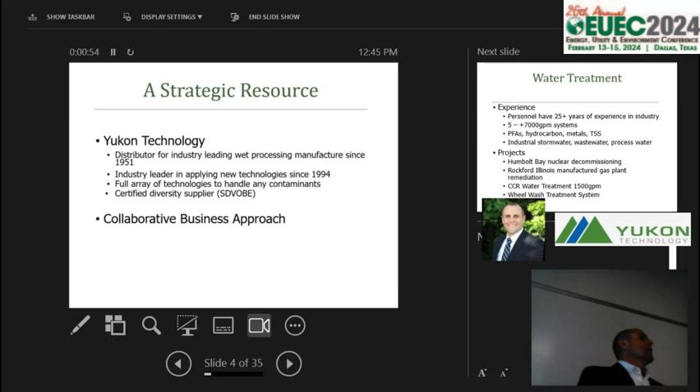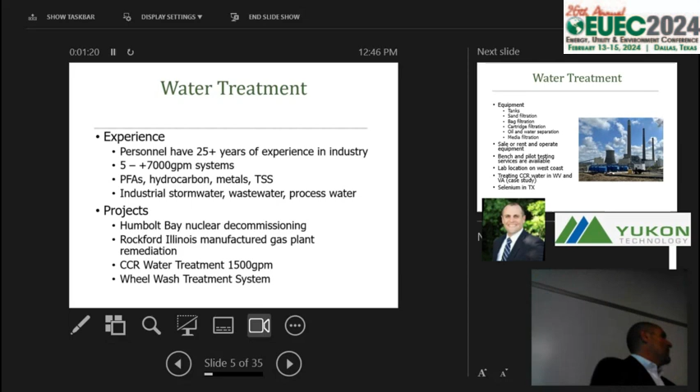And our approach is very much a collaborative business approach when we come to a customer: design the right system for you and achieve the results you desire out of it. Plenty of experience. Low flows, high flows, mechanical dewatering, the chemistry side of dewatering. We do both. My experience, why I'm here today, is more on the mechanical side. I know enough to be dangerous on the chemistry side as well, doing iron and copper, but there's other people in the organization that are better at that than I. So if you have more of the strictly water treatment side, I may get out of my league a little bit. I'm more on the mechanical side.

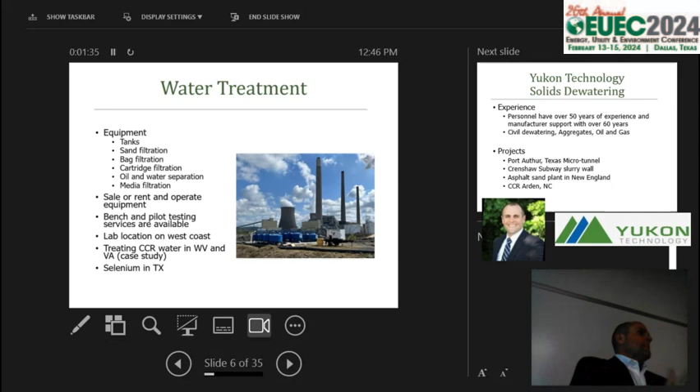Plenty of projects. This is kind of out there where we're doing water treatment, the various things we do for the power industry. But that's more on, again, the water chemistry side than the solids dewatering, the mechanical dewatering of the ash.

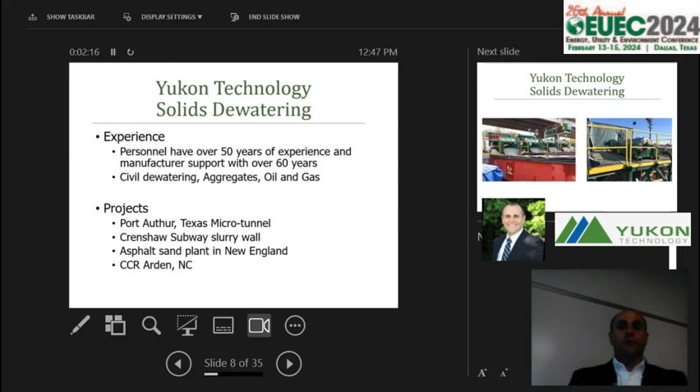So what we saw when we came to the market, the equipment we have is used in various other applications as well, whether it be tunneling, micro-tunneling, horizontal directional drilling, oil and gas drilling. It's those types of things where the mechanical process is there. It's been used for decades. The equipment is very well proven. We know all of what this equipment does. It is just new to the CCR world, with new regulations and new criteria coming out, bringing technology from these other markets into the CCR and utility world. So it's not necessarily new, just new to us.

So what is this equipment? Few pictures. Most of my presentation is going to be videos. I don't have as many charts and graphs, so it's a little more videos, hopefully good for an after lunch presentation.

So on your left, we separate particles by size, mostly to dewater and dry them out. On the mechanical dewatering and the water treatment side, we take dirty water or watery dirt, where it's mostly dirt, and take the dirt out of the water. So different than a straight water treatment job where it is by far water and we're talking TSS, ppms of dirt. Here it's mostly dirt. We're talking 70-30, those percentages. And we're drying this ash out in our application so it can be hauled from one site to the other or to the landfill or wherever it needs to go, and it's not spilling out.

So on the left, we'll separate the big particles with the machine on the top there, and then it cascades down to the machines on the bottom, and then goes through hydrocyclones. So we'll get down to about sand-sized particles, 74 microns, with just screens, and then we'll go down to 43 microns in your silts and your clays, your fly ash, bottom ash, with the hydrocyclones. To get down below, we'll use centrifuges, or plate and frame presses or belt presses. All those pieces of equipment are very much brothers and sisters in the same family when you look at it from a particle size range.

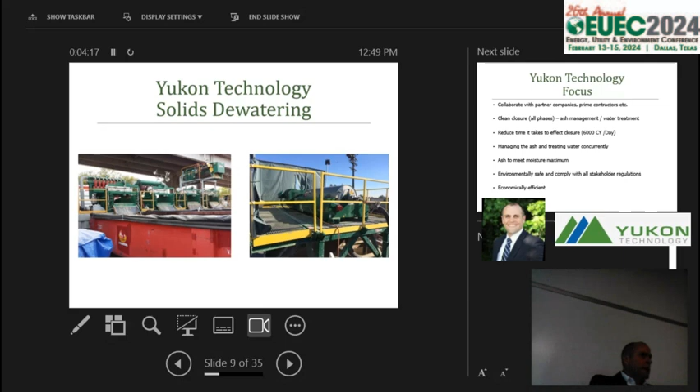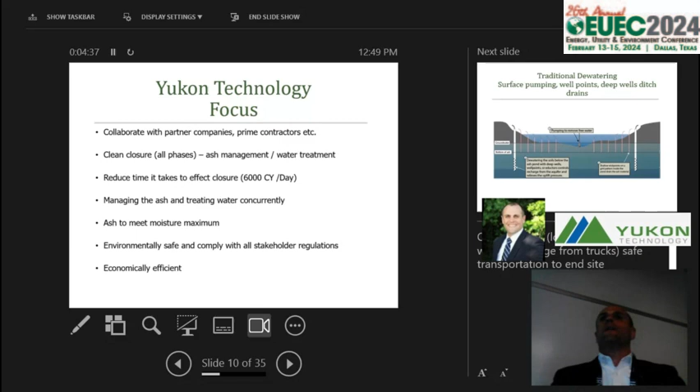We'll also use chemistry as this process bleeds down into the water treatment. We'll use coagulants and flocculants in the equipment to enhance that solids capture as well. So that's where those two disciplines, the mechanical and the chemical, start coming together. Again, collaborative approach, up to thousands of yards per day in terms of drying out the solids, and I do have a couple charts with math on them, basically numbers to show what we produce and the equipment. Typically, this is how most ash ponds are dewatered.

As we say it, we are a tool in the kit bag of the ash pond closure. We are by no means the whole toolbox. We are one size wrench. That is what we are. We are usually a subcontractor to a general contractor in this market. We will work with that general contractor and the owner in a particular aspect where the ash is usually submerged underwater. So in order to handle that problem, typically the market right now pumps off the surface water.

It may go through some water treatment, it may not, just depending on, and then out the door. Up to, you get close to the ash, then you start having to put in deep wells and shallow wells, and you actually draw down the water table so the general contractor can dewater and work in the dry. That

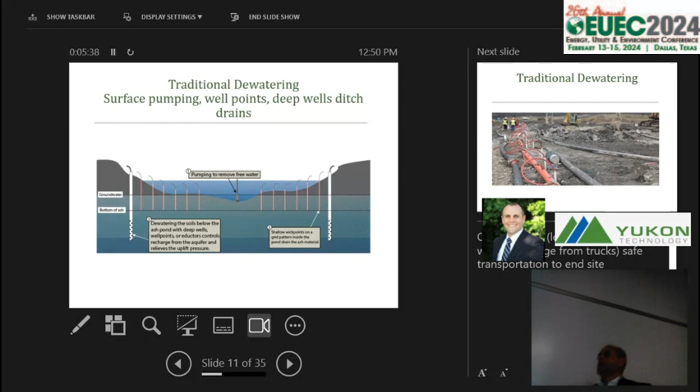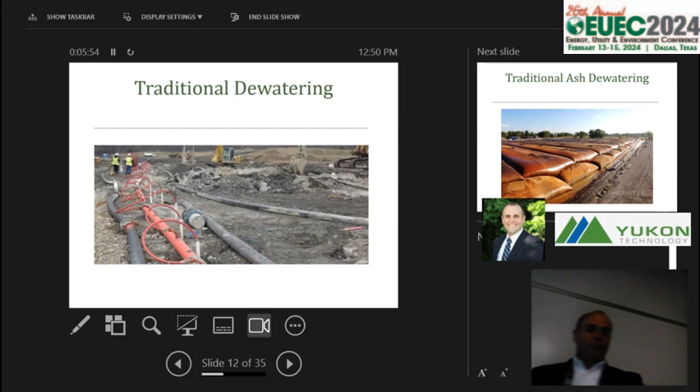then leads to a situation like this where you have well points, conveyance lines, and it can inhibit movement in and around the project site, as well as more things that can fail and freeze throughout the project. When you have to deal with your water, now that water goes, it can go to geotubes. That's sometimes used, as David mentioned earlier, a very low cost option. You have to have time and space in order for those to work.

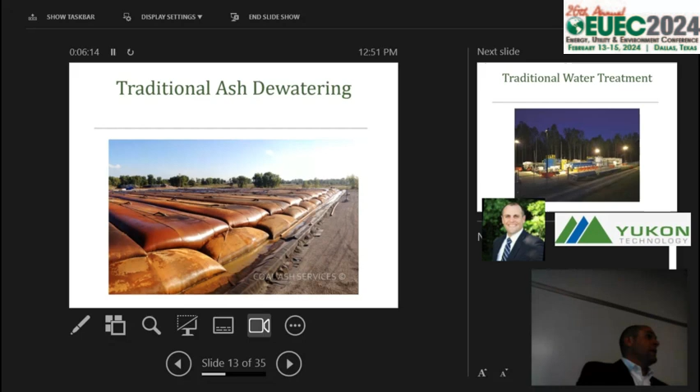And they do work, and they work fine. We use them as well. But when you don't have time or space, you need to use a mechanical separation process. That water treatment often then has a bigger system because you're continuing to drop down that water table, and so you have to have a greater water treatment footprint in order to treat all the thousands of gallons you're producing throughout the lifetime of the pond closure.

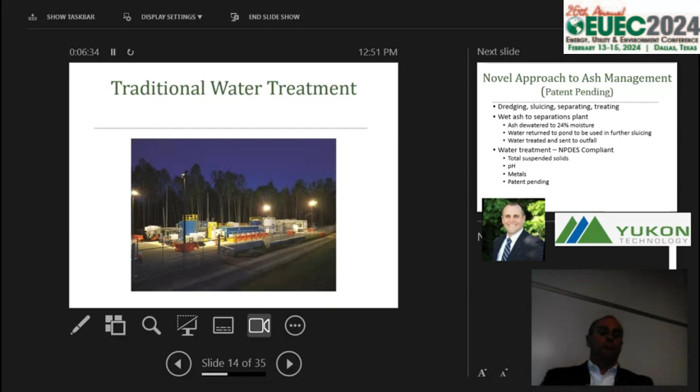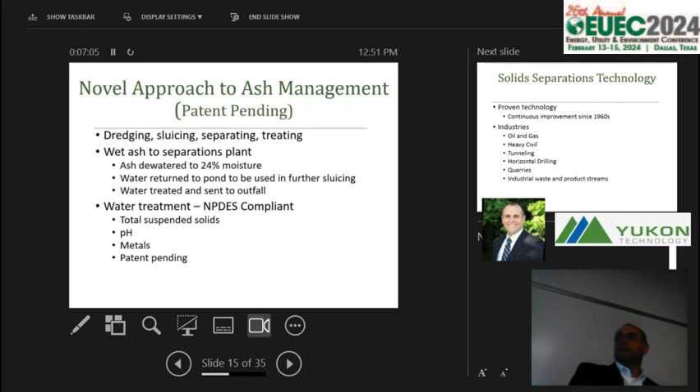We propose dredging, sluicing, and separating it, and then you can treat it. And you can either treat it partially or send that water back to the pond to grab the next pound of ash. So we'll use dredging of some sort, whether mechanical or hydraulic, in order to get that ash moved, sluice it, and then separate it out in the mechanical dewatering process. That slipstream of water can then be treated for what it needs to be to go out the door. Again, as I mentioned, new to us, not new to the market.

So here's us on an ash pond closure. These are small pieces of equipment, the smallest we could put out there. So just for relative scale and size, this is really, really small. And I'll show you some pictures of the big stuff. So what we were doing here is, you see that river on the inside, the excavator is going to mechanically dredge that out, put the ash into the top of this hopper here, we'll shake it, and we'll remove the big stuff, I call them the cats and the dogs, which for us is greater than 1 millimeter.

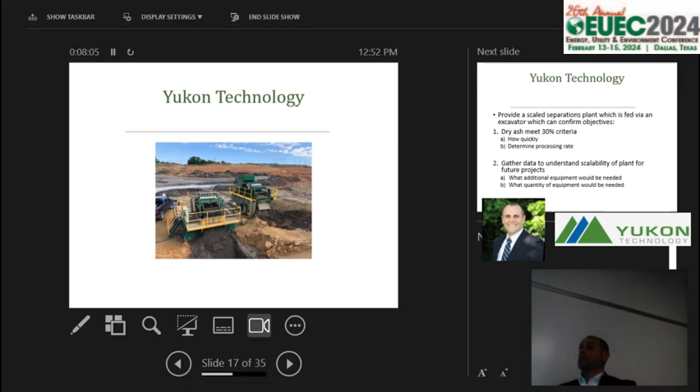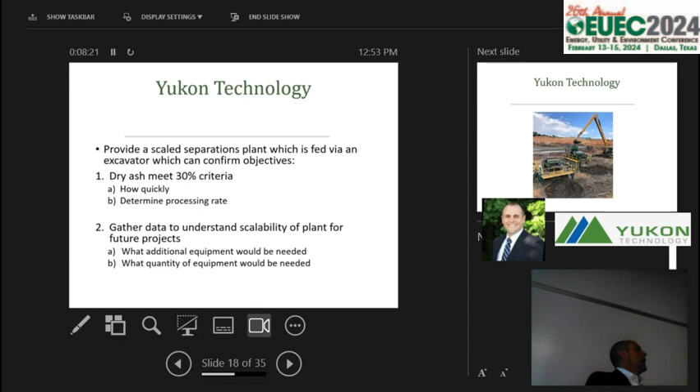And then we'll take smaller than 1 millimeter, send it over to this small plant, hydrocyclones over a vibrating screen, pull that on the side, and we're taking essentially liquid ash and drying it out in a very continuous process. So that is what we're doing. The majority of the rest of this presentation is all videos. The criteria we were asked to meet was 30% dryness. They also asked how big can you make these things, and we knew the size of our equipment and what it could do. The customer wanted to see it themselves, which is understandable.

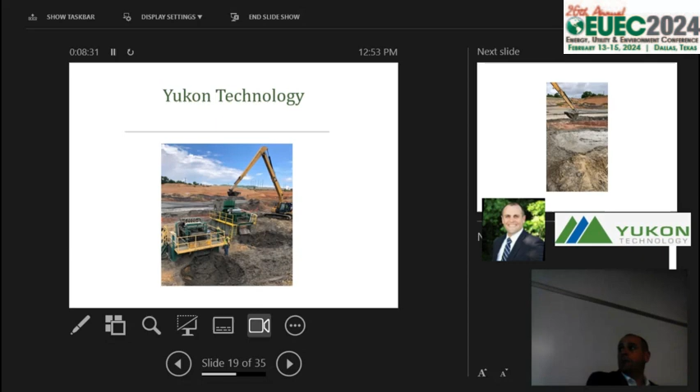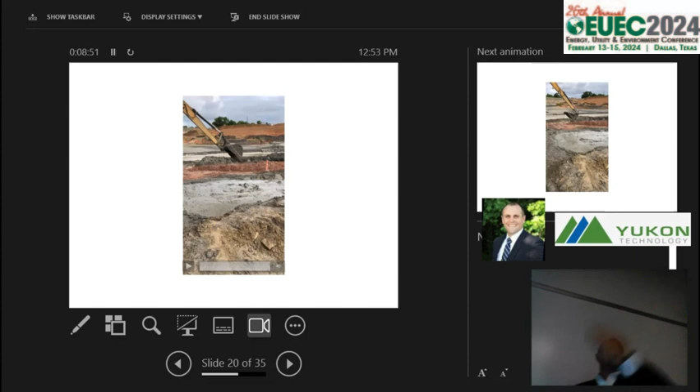So here's a picture of it, and hopefully this video plays. What I'm trying to do in this montage of videos is put you in a day in the life out on the project. This is one day, one morning, as we're taking videos of that process. You couldn't all be there, so I am bringing it to you. This is not a collection of best of. You're going to see the same excavator, same bucket, doing the same thing, so you see everything as if you were standing there.

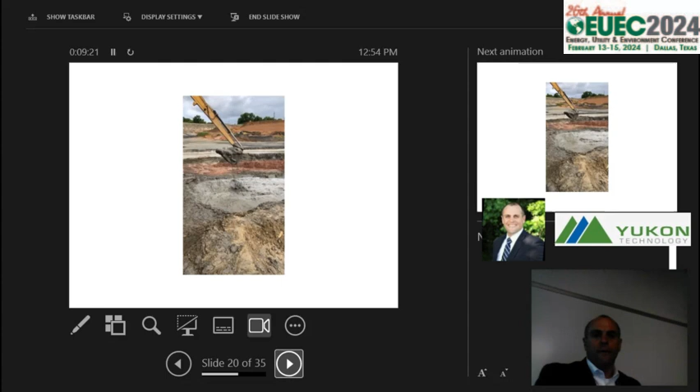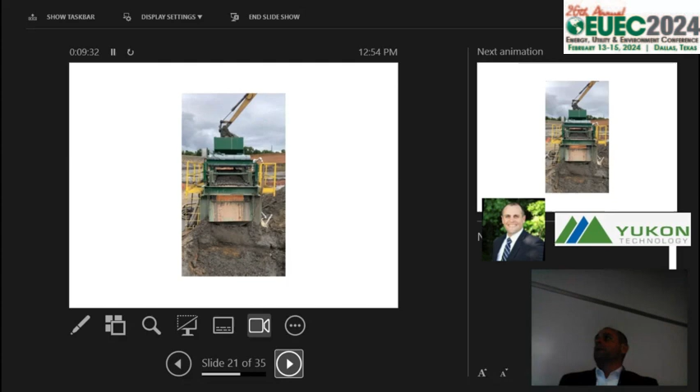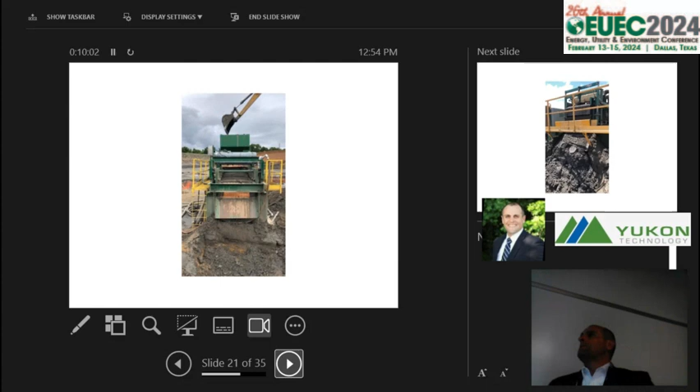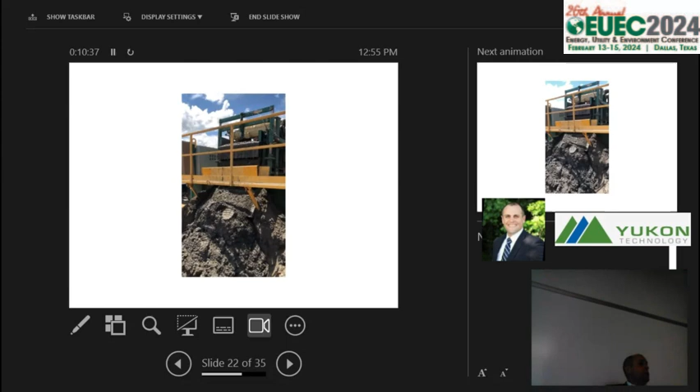This piece of equipment, again, small, but this was the workhorse. You're looking at particle size 74 microns down to about 43 microns. Silts, clays, below sands is what we're capturing at this point. Hydrocyclones over a vibrating screen. You can see the particles coming off the end and stacking up. That same day, that excavator is right now loading the other side, and that is coming out the other side, those size particles.

Here's another view of the same thing. It actually looks like a liquid coming off. That's because that screen is vibrating. It's taking advantage of the liquefaction of what ash does when it's vibrated. It wants to move and slide. We take advantage of that in order to actually dewater the ash.

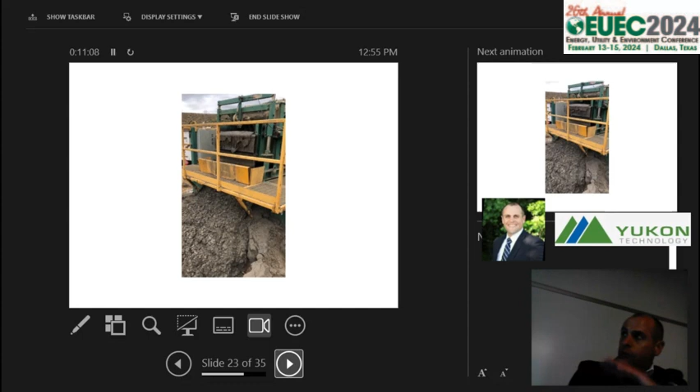You see the little chips falling below. You don't see a grate because it's actually stacked up so high in this video. And here, what I want to draw your attention to is the excavator is going to actually boom around into the view. You're going to see it scoop the ash from right here, and you're going to see the edge actually hold on as it scoops it out.

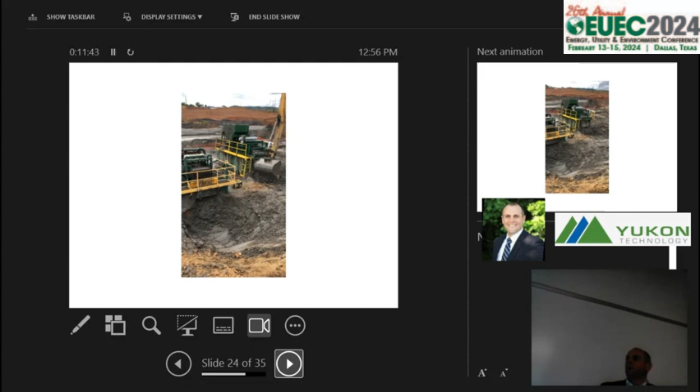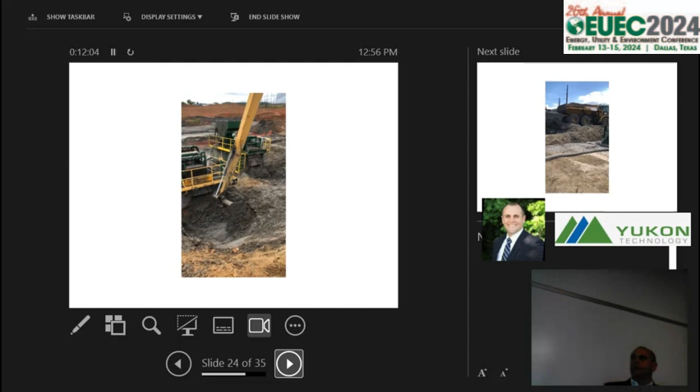So you can see within a few minutes that excavator was scooping the wet flowing ash, and now it's scooping out the dry ash a few minutes later. See the consistency of that ash; it can now be put in the back of the truck and hauled down the road.

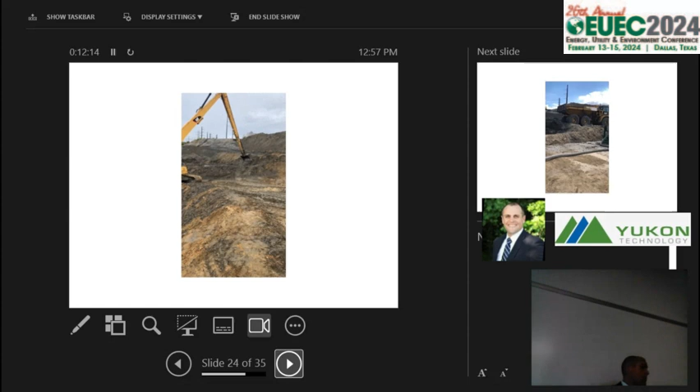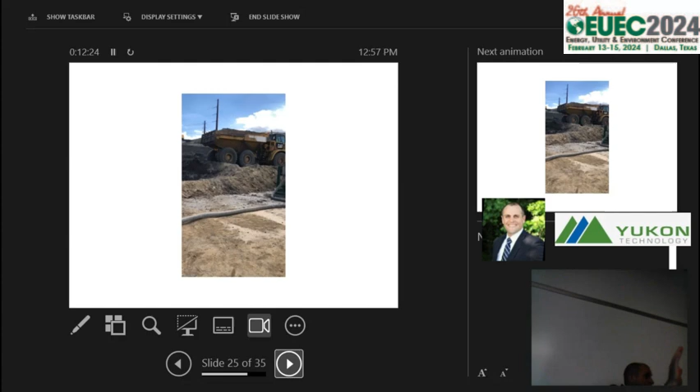To operate the excavator, above, you can kind of see him there. In the interest of time, that was about 5 minutes of our guys doing that. I'm going to spare this video just in the interest of time and get to the data.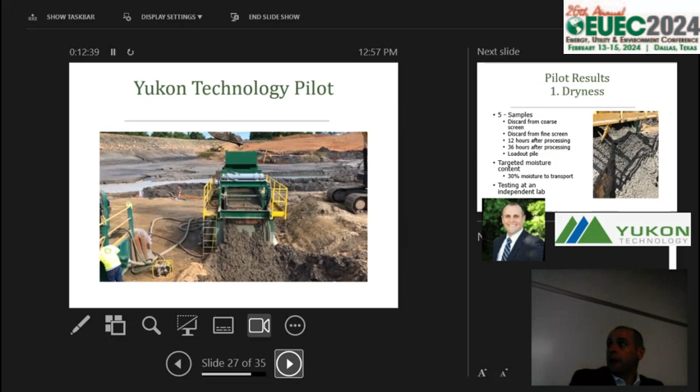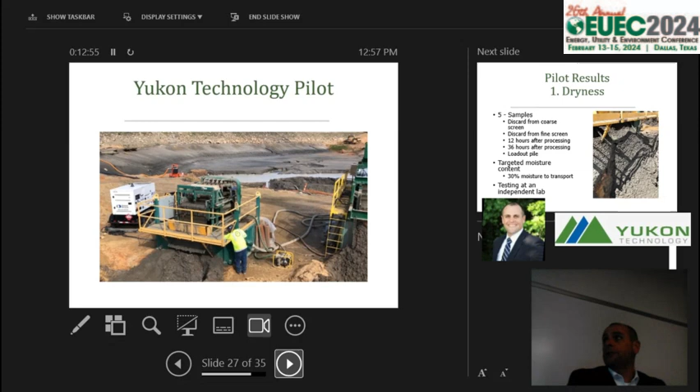So this is a different day. You just see both of the machines working together. You see it stacking up there, and then you're going to see it pan over and coming out the other side. So it's a continuous process. This was a mechanical dredge, and we only went down to about the 43 microns because that's what the customer wanted. They didn't want to introduce the hydraulic dredge. They didn't have that out there. They said, look, we'll mechanically do it, and this is how they were doing it.

So the data portion, I call it the nerd part of this. The engineer comes out in me. 5 samples. We had discard from the fine screen, the coarse screen, the loadout pile. So what the loadout pile was is this customer is actually doing beneficial reuse. So they were hauling it from one state to another. That was what they called the loadout pile. And so that was the gold standard.

We had to really pull that 30% moisture number out. Like, what is the standard? I want something analytically that, whether I succeeded or failed, I want to be held to that standard. We really had to pull that 30% out when we got on site, since they were doing the overland trucking. I wanted to get a sample of that, because if I could meet that data, whether I met your 30% or not, that's what's actually being used. So target 30%, again, independent lab in terms of testing.

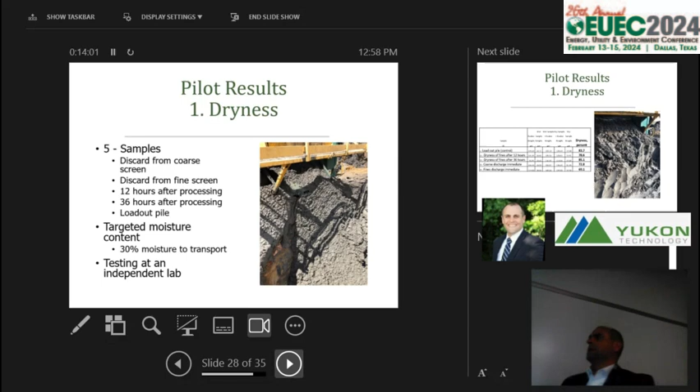So the loadout pile, about 17% moisture in that. So fairly dry, that's what's going out. And the whole reason this customer was out there is it would rain on them, and then they would start at day 1, and it took them about 5 days to get the ash dry enough to where they could drive it out. And so if it rained anywhere in those 5 days, they were taking backward steps. So that's where the mechanical process was helping them out.

Immediately off the coarse screen, bigger particles have less water. We were meeting our 30% criteria, but not quite what that loadout pile was. And on the fines discharge, we were just less than 1% underneath that 30% target with just the fine particles right there immediately off the screen.

After 12 hours and 36, why we had those numbers out there. The thought process is the general contractors are out there working for a day, they're going to create piles, and then they will load them out the next day. That would be about 12 hours from the end of shift one day to the beginning of the shift the next day. So we wanted to know, Mother Nature's going to do her thing, especially overnight, which is when these samples were taken, to show that.

So that's the dryness of just the fines after 12 hours. So we were within a few percent of meeting that exact loadout pile that took them multiple days, when all they could do was in the next shift. We did a 36-hour as well. We didn't know the answers to the test before we took it. Granted, the numbers say it's drier than the loadout pile, but I'll call it about even. We're within a couple samplings there.

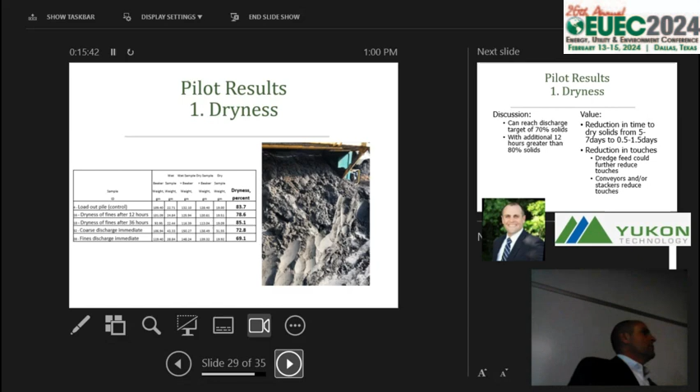So it took from 5 to 7 days down to a half a day to a day and a half, when you think of 12 to 36 hours. So significant savings in terms of time for that contractor to be able to load ash out.

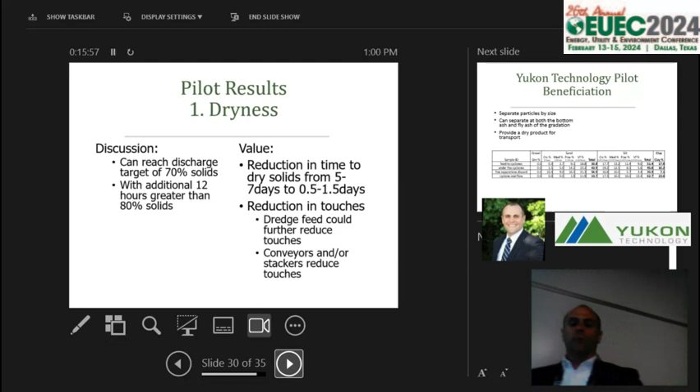Since it does separate by size, in some instances we can separate the bottom ash from the fly ash if that gets used for some beneficial reuse. Some people really like that, some people really don't.

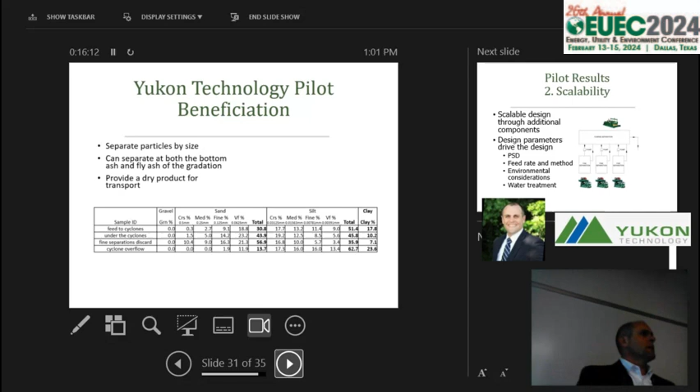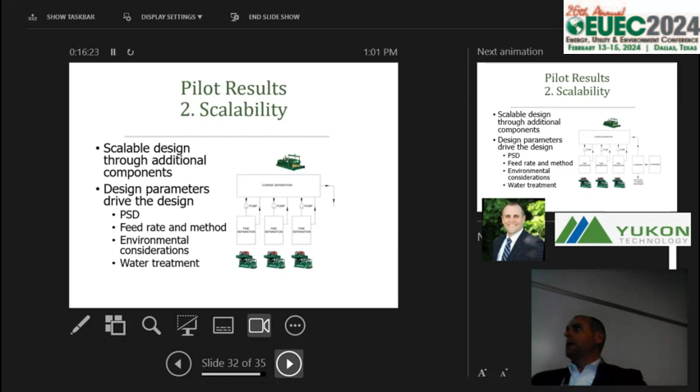And then scalability design, again, as I kind of mentioned, proven technology. We know the equipment. We put these systems together, and you just scale it based off size, looking at the particle size distribution. What are those sizes? What rates do you want to produce at? And we build a system, and we build systems similar to this one. So this is one that we built as well.

Sorry I've condensed that. I hope you listened quickly. Are there any questions? So again, more mechanical dewatering of the ash, a tool in the kit bag. By no means do we think we are any more than the instance when it's really wet.

Yes, sir. First, can you speak to, like, tons per hour roughly that the pilot was generating? So that one was generating at about 90 tons an hour, if I remember correctly. But again, if this customer said, hey, we want to do the 6,000 cubic yards, we would say, okay, there's more machines. And again, those were the smallest ones in order to just be cost effective.

Yes, sir. The question was the particular type of ash pile you're dealing with, is it bottom ash, fly ash? It was a mixture of both, and I'll be honest, that was not FGD, but again, we can do FGD because it's separating particles by size. Sometimes it matters whether they're sticky or not. We get problems with chicken feathers randomly because they're wire screens, but we don't have too many chicken feathers in ash ponds, so I think we're okay. But we do have solutions for that.

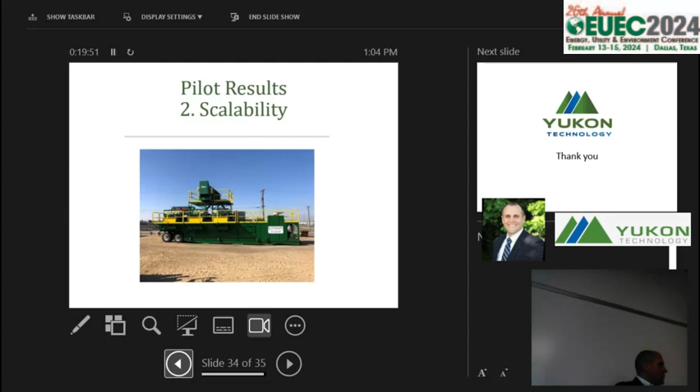Kind of thinking again about the legacy rule and some of the ponds that may not have been as segregated as they are now for beneficial use purposes. So old ponds that may have had a mixture of scrubber solids, which are generally really fine, and fly ash with bottom ash. And you mentioned that you're screening it sometimes. Yes. Heterogeneity in these ponds could be a real problem. I'm just wondering how you handle a situation where, despite your best efforts, your screens get blinded and you just get bypassed. What's the real day in the life look like for someone who's got operational challenges like that? So screen blinding can be a problem in any of those industries.

There's two tricks that we have, and it has to do with the partners that we work with. The screens themselves are a 3-layer cloth, and they actually shake and vibrate. So they are self-cleaning, is kind of what they call it. Now, I use air quotes because you can still get same-size particle blinding. At that point, we would go to a urethane screen that is a single layer cloth. It's a long life screen that we can use with these machines, and it's a wedge, not a wire. It's actually patented for the guys we work with. It's a wedge, so it's either bigger than the opening or smaller. We get less production through that, but that can help with getting through areas that are sticky, that are similar size.

The other thing with blinding is it can be a chemical blinding. If you're using some of the flocculants, coagulants, we have to watch that. That's usually introduced after screening because you'll actually coat that screen with like a snot type. Yep. And you can change out these screens. They're usually minutes to change out. So if you do get a bugaboo, you can rectify that fairly quickly.